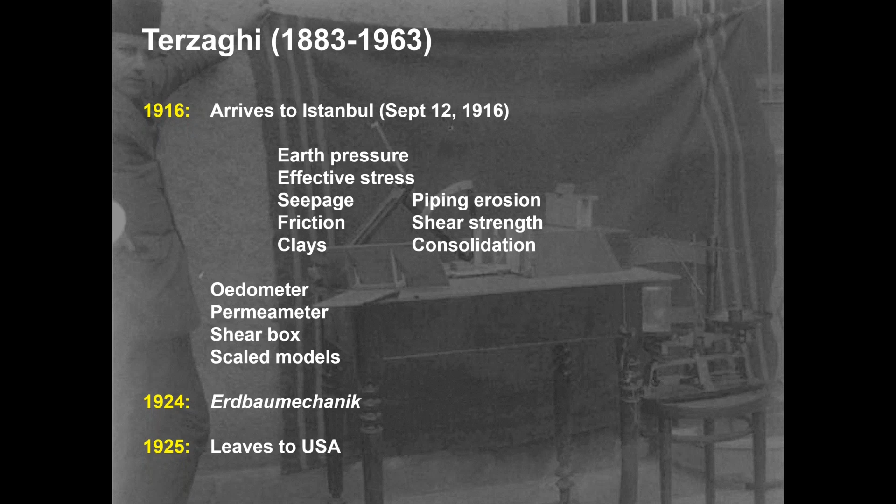By 1925, he leaves to go to the US and he floats back and forth. We'll come back to the story later on during the presentation, but let's look at our field since then.

The field has evolved tremendously because we have had to confront very important challenges related to infrastructure, dams and tunnels, earthquakes. Environmental engineering kept us alive and reinvigorated throughout the 80s and the 90s, and more recently, energy geoengineering. I wonder what's coming next. We'll try to close with those thoughts.

Throughout this evolution, we have also seen significant developments in relationship to lab and field characterization, geophysical methods, numerical simulation. Another important thing: while Terzaghi brought in the mechanics, in one of his early papers, the 1925 ENR paper, he mentions Gouy-Chapman. He understood that double-layer concepts were coming for clay. He got it clear in the 1920s. But basically, he brought the mechanics. Gradually, we brought in the physics and the chemistry, and more recently, primarily in the last 10, 15 years, the biology. This has been the evolution of our field throughout the 20th century and the beginning of the 21st century.

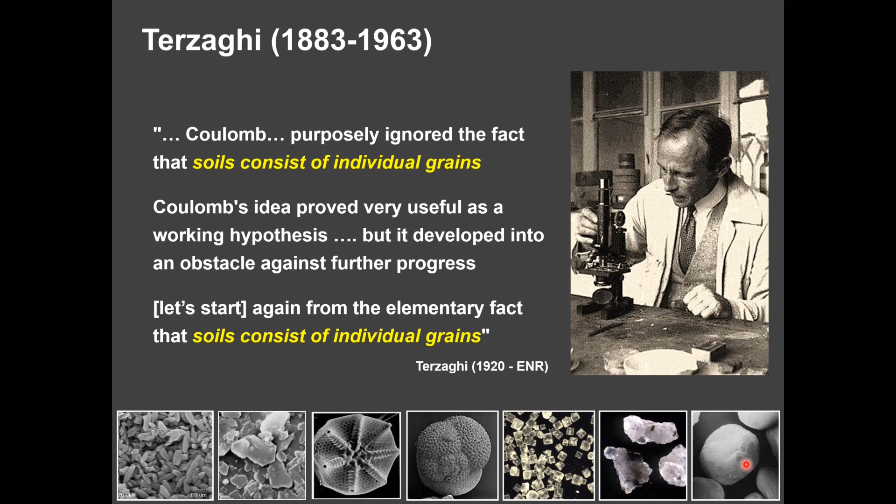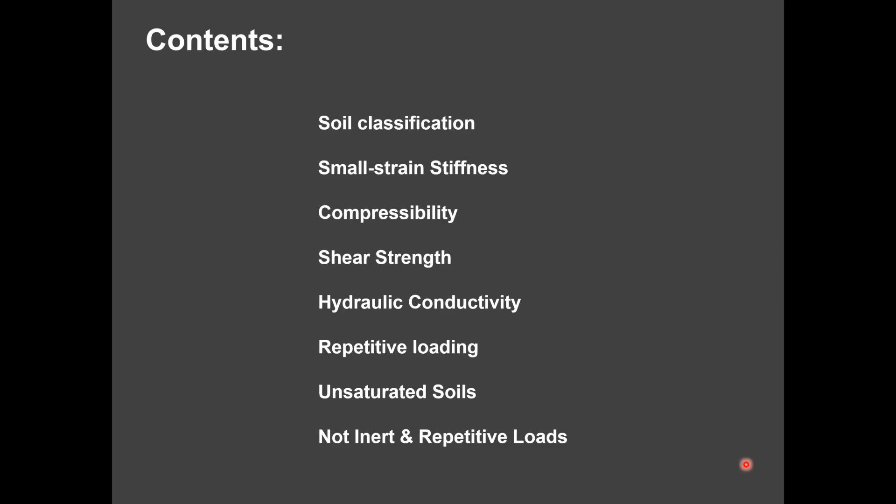Soils are made of grains. With that in mind, we're going to advance through several parts, almost like going through the classical soil mechanics text. But I would like to tell you where we stand at the beginning of the 21st century in each one of them: soil classification, stiffness, compressibility, strength, hydraulic conductivity, repetitive loads, unsaturated soils, the fact that soils are not inert. Let's start.

This is Casagrande. Casagrande was in a bad time after the First War in Austria, and he decided to go and seek new fortunes in the New World. He went to New York, eventually got a job in New Jersey as a draftsman, and from there went to Boston to seek other jobs. During his visit to MIT, he met a fellow called Karl Terzaghi, who had already returned from Istanbul and gone to MIT. He accepted the job on the spot to become Terzaghi's apprentice or assistant. Later on, Casagrande would take the chair in soil mechanics at Harvard, and eventually he would hire Terzaghi back into Harvard.

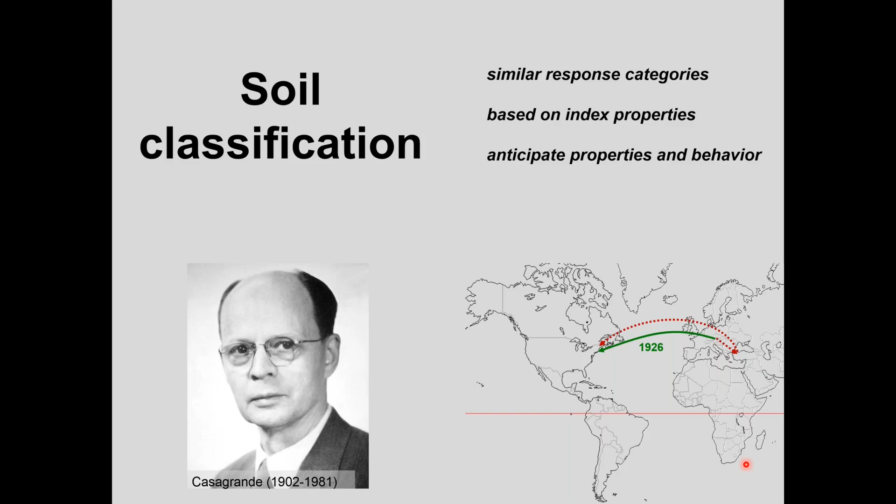Casagrande made amazing contributions. One of them, starting in the late 30s, 1936, and then later all the way to 1948, was the soil classification. Since the late 30s until now, we have gone through 80 years of geotechnical engineering and gathered so much data. It's time for us to reassess soil classification. It's important because we're not just giving a name to a soil, we're trying to cluster soils according to their characteristics to predict and anticipate behavior. These are very important decisions that we make.

There are fine soils and coarse soils, and the distinction is so marked. The sieve 200 is such a wonderful choice, so much wisdom, because the fine-grained soils are formed by chemical precipitation, including all the clays, or by thermal processes like fly ash here on the lower part. Look how spherical they are, like balls hung on Christmas trees. But these are micron size, a few microns in size, and these are diatoms, biogenetically created.

On the right-hand side, it's all about mechanical processes. We crush, we create impacts, completely different mechanisms, completely different shapes. Before I go any further, let me tell you that shape is important, critically important, not only size.

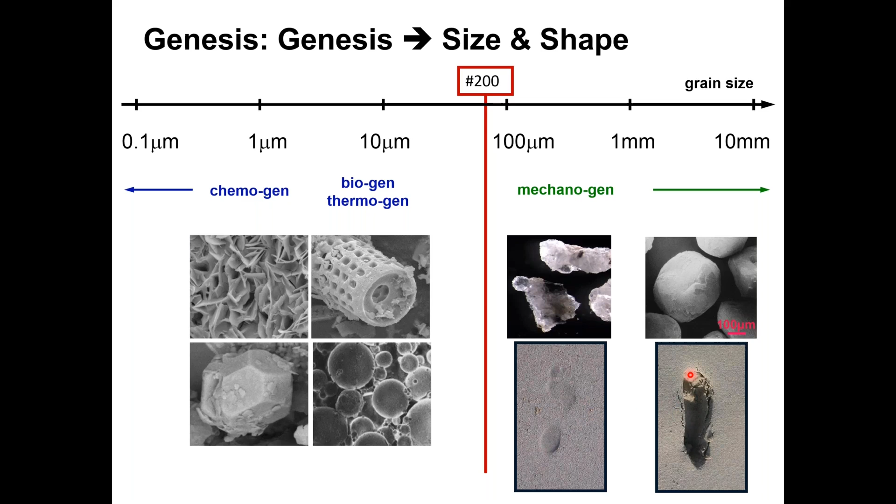If you walk on this crushed sand, this is your footprint. If you walk on this rounded sand—and this is actually Mark Randolph's footprint in the southern part of Western Australia, carbonate, rounded, beautifully rounded carbonate sands—you sink. This is not about capillary forces; these are all just saturated sands immediately after the wave recedes. So shape is critically important, and we'll come back to that.

There's another characteristic that changes across the sieve 200: which forces control the movement of these particles. If the particles are large, like what Tony is working on with rockfill, it's self-weight and gravity, maybe some buoyancy counteracting, but it's all about volume. But with fine particles, you see dust gets stuck to our furniture—those are electrical forces, and you build sand castles with fine sands. Capillarity takes more and more importance as particles become smaller. Drag can move particles, but it's tricky because they need to be small enough to be moved away, but not too small to get stuck on surfaces. Throughout all this, the more you load the soil, the more force every particle has to carry for being part of the skeleton.

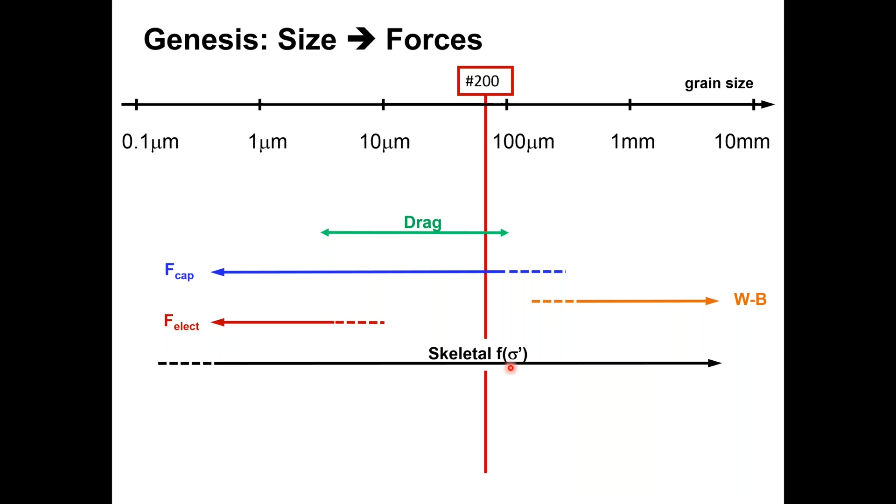So the governing forces change, and here we are converging into the critical aspects of soil classification. On the left-hand side, where electrical forces were important, if you change the pore fluid chemistry, either the pH or the ionic concentration, you change the fabric. Dramatic effects. Beautiful work by Catherine Klein, a former professor at Toronto who passed away too young.

On the right-hand side, we recognize one more thing. We already saw that particle shape was important, but now we realize it's the relative amount of particles. If you have a little amount of fines, the coarse particles form the granular skeleton. But if you have enough fines to separate the coarse particles, now the fine particles control behavior. And this is the heart of soil classification.

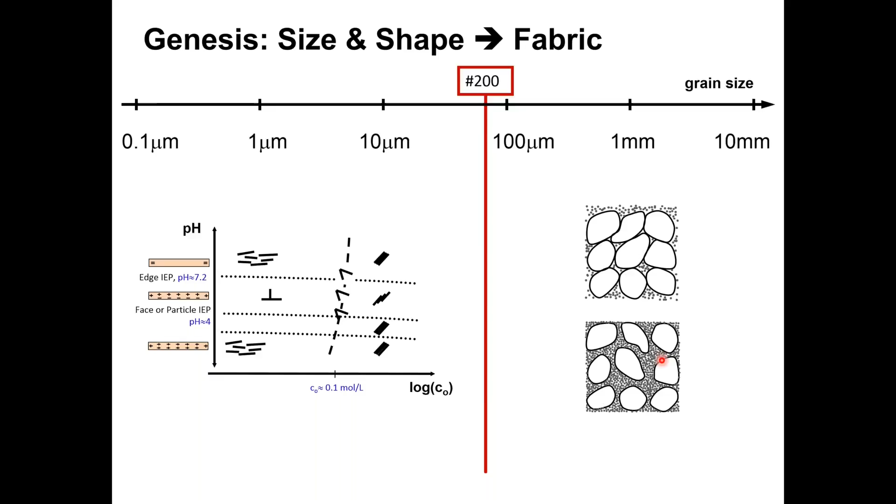For the fine grains, now we don't do the liquid limit and plastic limit anymore. We're doing three liquid limits: with deionized water, with brine, and with kerosene, to control the interparticle forces. We want to see how sensitive the fine soils are to changes in the pore fluid chemistry. And this has a very powerful clustering ability.

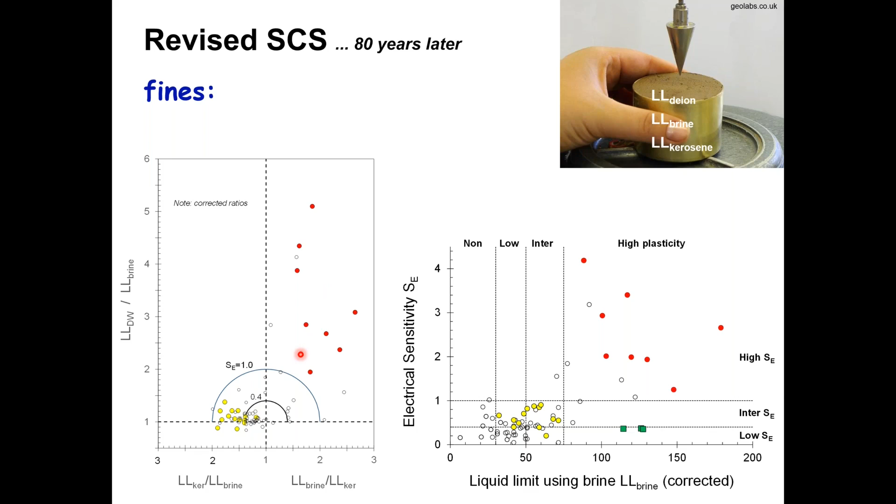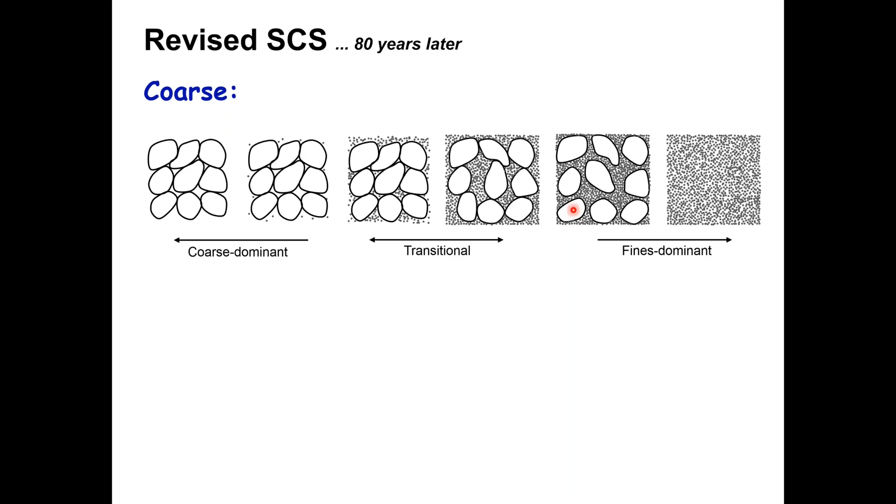On the right-hand side, we're trying to find the thresholds where the fines fill the voids. That's a very important threshold, because when the fines fill the voids, they plug the voids and control permeability. And when the fines separate the particles, the fines control mechanical behavior. So now we can do this with very simple gravimetric volumetric equations, the second week in any soil mechanics course.

And we can put all this in a triangular chart. This is very powerful. On the left-hand side, we are questioning who controls the load carrying capacity. On the right-hand side, who controls fluid flow, permeability. And then we can put nomenclatures that capture both the load carrying capacity and the permeability.

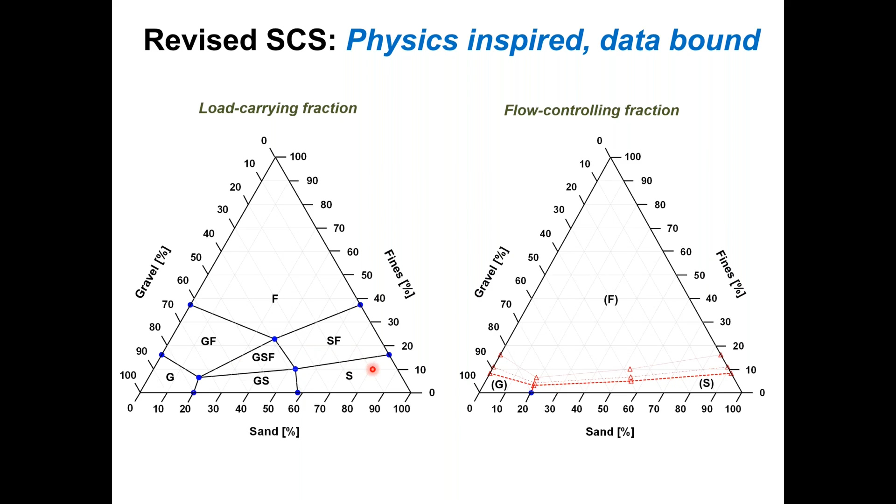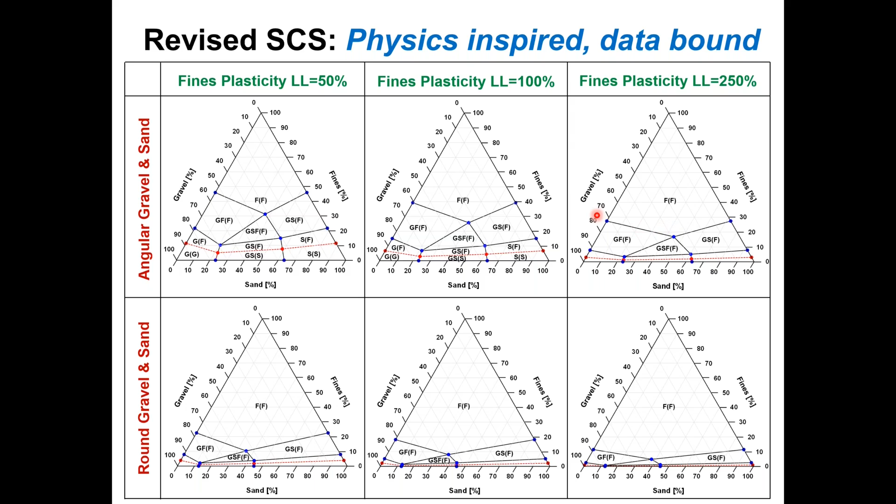Colleagues, these charts and the new soil classification method have been designed taking into consideration not only the physics of fine and coarse soils, but also huge databases we've used to identify all the transition points. I can assure you it is very robust and very predictive. I strongly invite you to look at this. There are several papers on this; I'll be happy to send you all the information. Towards the end, I'll show you an app that can help you—you just put in a few numbers and it tells you the full classification.

So now let me talk about small strain stiffness. When soils deform, there are two stages of deformation. At the beginning, it's like two soccer balls that you bring together—they deform at the contact. If you keep deforming, particles begin moving relative to each other. So there is deformation at constant fabric, and deformation due to fabric changes.

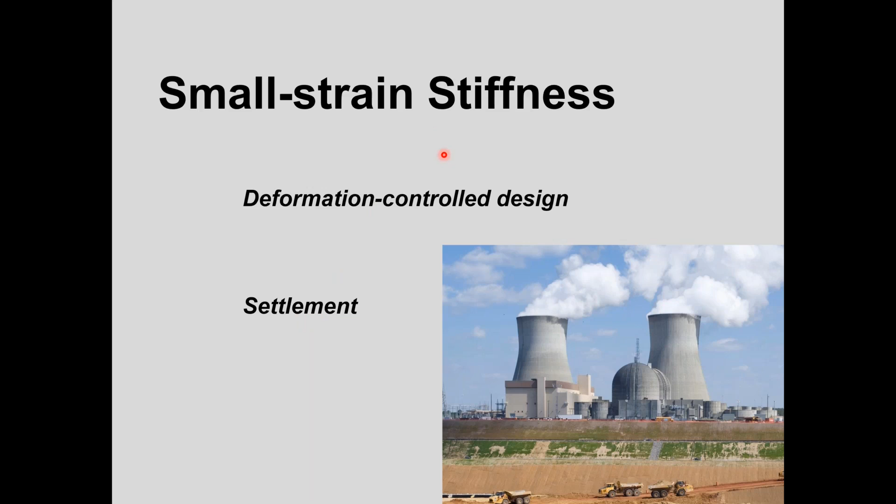So let me show you how the soil responds, because at this point it's the contacts flattening—the two soccer balls coming together, flattening the contacts. When you take a soil, let's say in an oedometer, or this could be a big truck coming on top of a granular base, as the truck comes, or as you're putting load in the oedometer, the travel times get shorter and shorter, and then you remove the load and the contact stretches out again.

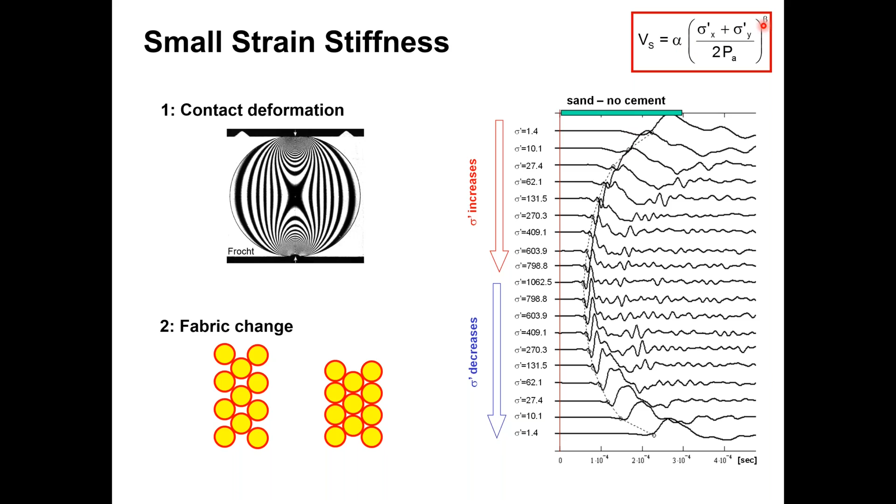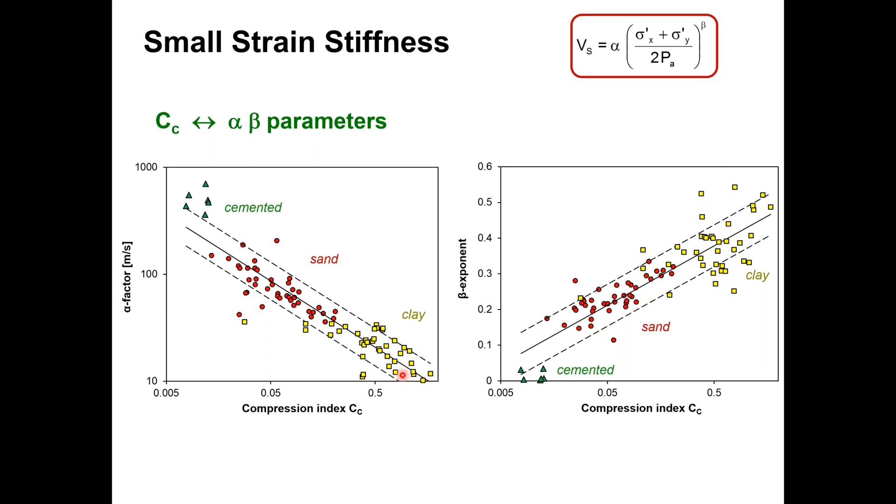So you track the changing state of stress very well, and it follows a power equation. Remember this alpha factor and beta exponent, because we now have very large databases for this alpha factor and beta exponent for different soils—cemented soils, loose sands, dense sands, clays. Somewhere here would be Mexico City clay. And the same for the beta exponent. They are intimately related to each other.

As you can see, there are literally hundreds of points. Each of them involves a large number of tests. So this has taken 20, 30 years to put together from the community around the world.

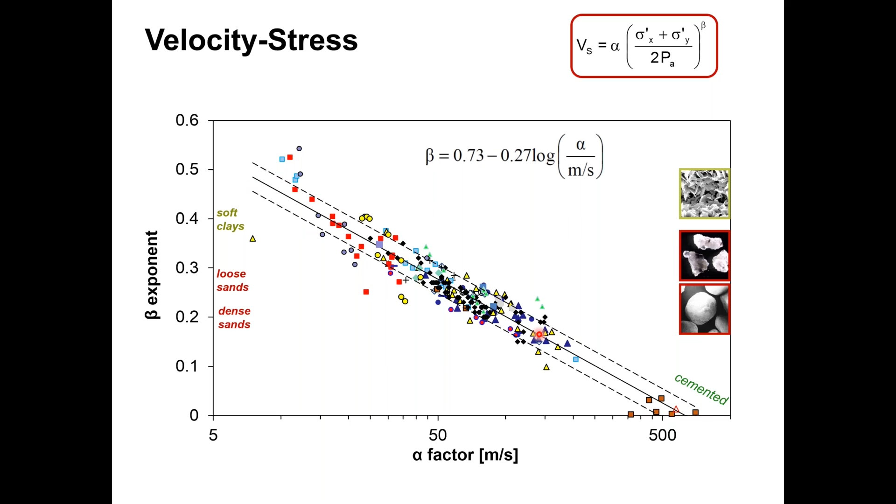Very powerful. Now, what happens if the soil is cemented? Imagine that between the two soccer balls you put gypsum, and now the contact gets flatter—this is actually salt that has precipitated between two spherical grains. And now when I load it, the shear wave velocity doesn't change. It's very stable, because the stiffness doesn't depend on the contact anymore.

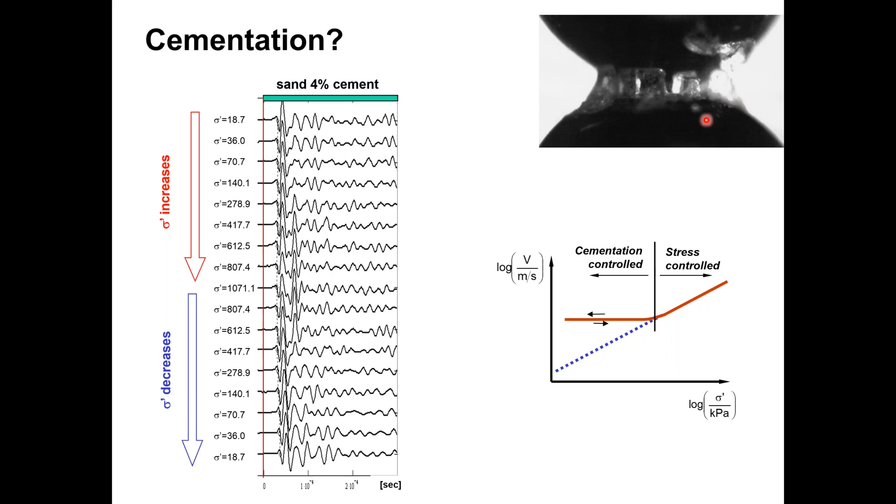Unless you get to a point that you break the cementation and go beyond that, it becomes a stress control again. This is important because soils have been there for a long time, and they become friendly with each other through this form of diagenesis.

So the contacts are always a little bit flatter than in a freshly remolded soil. Every time we sample the soil, imagine the soccer balls, we relax it, stretch, and break the cementation between them. It doesn't matter if you put it back in an oedometer or in triaxial, you do not recover that stiffness that broke.

We have now lots of data, an original paper with Ken Stokoe, but we've added more data that shows the effect of sampling. If you can measure the shear wave velocity in situ, it will lead to very, very good designs.

Now let's talk about compressibility. Let me take you away from soils, because we always talk about the consolidation test, but let's think about the atmosphere. In the upper part of the atmosphere, the molecules of air, nitrogen, CO2, oxygen, are far away from each other. But as the atmosphere gets heavier and heavier on itself, it has to carry more and more weight, so the air gets compressed.

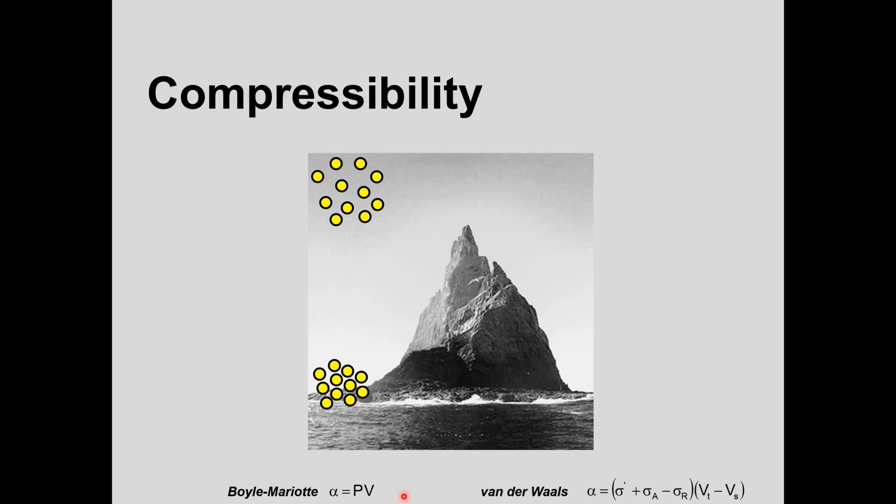That is the reason why we have more air at the bottom, near sea level, than at the top of a mountain. This is the same as self-compaction of sediments in the subsurface, exactly the same. This was, you may remember, Boyle's and Mariotte's law, which van der Waals corrected, etc. I'm going to come back to this. It's exactly the same as soils.

So this is the behavior of soils. Folks, we have made it a tradition in our field to show everything in semi-log scale. And so this, which looks almost like an exponential decay, at some point becomes linearized. Not only that, we force a straight line, typically for the stress of interest, but look what happens with a straight line.

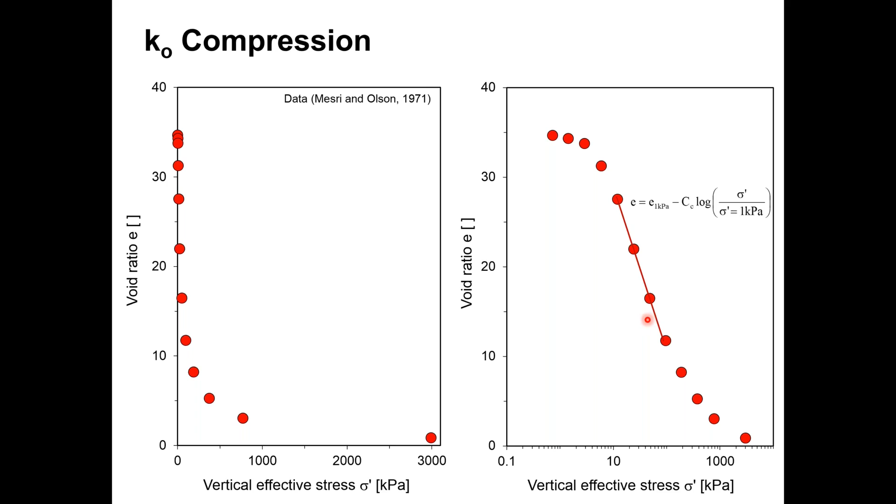If you are out of the area of interest, this shoots to infinite void ratio or to negative void ratio. Both of them are incorrect. So our typical Terzaghi-an model is not asymptotically correct. If you're working in a broad stress regime, for example anything on the seafloor geotechnics or big stress changes, this will cause trouble.

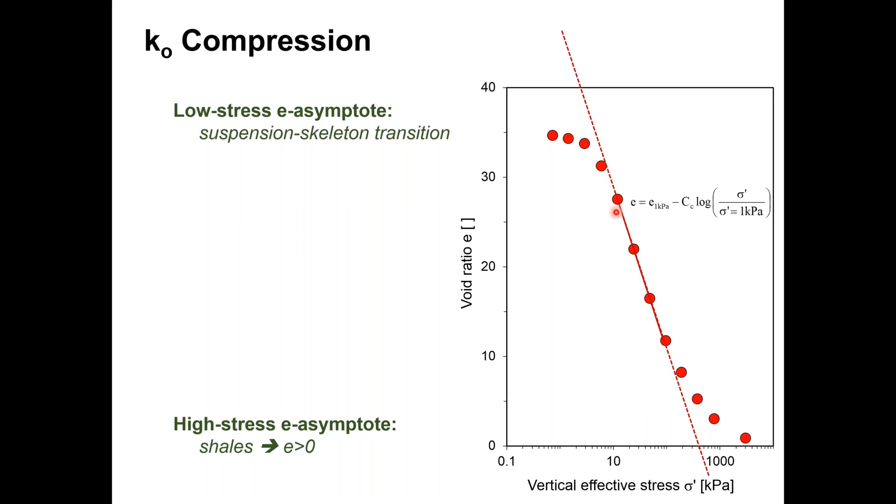So what do we do? Well, we take a double line, what we call here the reloading line and the virgin line, and we make magic to find the pre-consolidation stress. I think we have to walk away from that. Particularly for numerical methods, it's much nicer to have continuous functions, so we can modify this equation to make it asymptotically correct, but we can also take other forms of the equation.

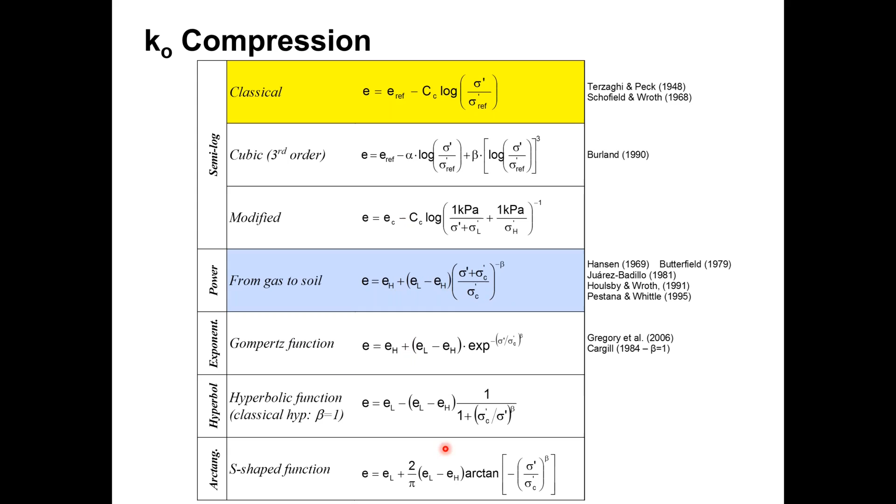I noticed that you're going to have Juan Pestana presenting the numerical modeling. Juan Pestana and Whittle use a similar equation. We have rewritten all the equations here to have a similar structure. But these equations are all very good equations, continuous from low stress to very high stress, and you can fit them whether in linear-log or on the true scale of nature, linear, in different ways.

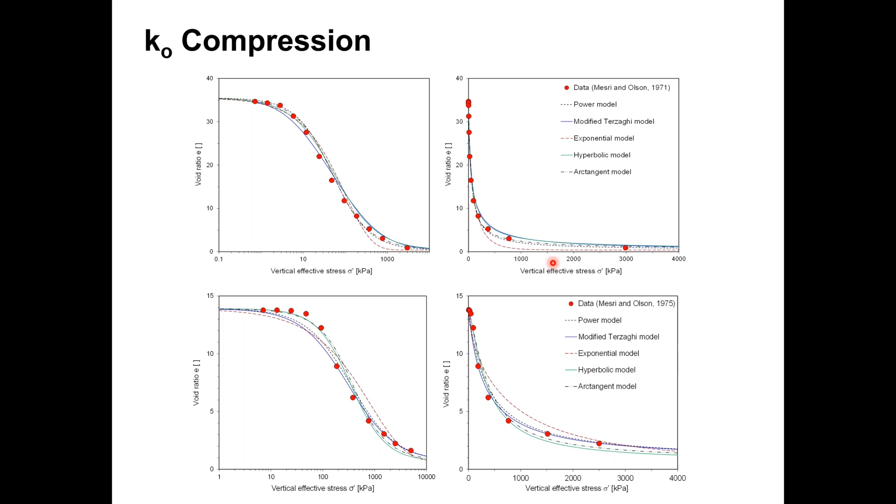Shear strength. Shear strength is a complex one. I've been studying it on and off for the last 30 plus years, and we are still pushing it. So this one is a complex one.

We really trivialize it. We think of Coulomb making this experiment, but this experiment is very simple because it's a solid on top of a solid. When you have a soil and you change the normal load, you are actually changing the coordination number. So it's not just friction, it's rearrangement of particles for the new state of stress.

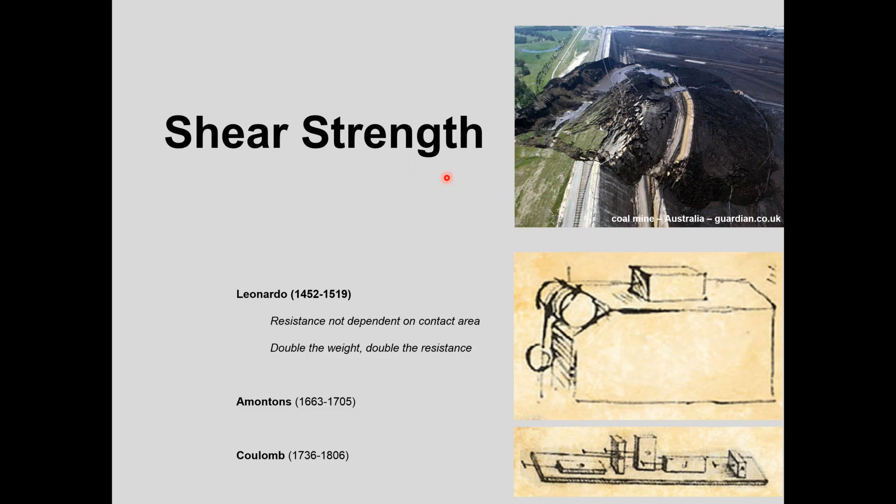So we should probably change the words a little bit, and furthermore, the parameter affects things in an exponential form. If you change the friction angle by 1 degree in your bearing capacity equations, you know that you blow any factor of safety. So this is a tricky one, and we have to keep looking at it.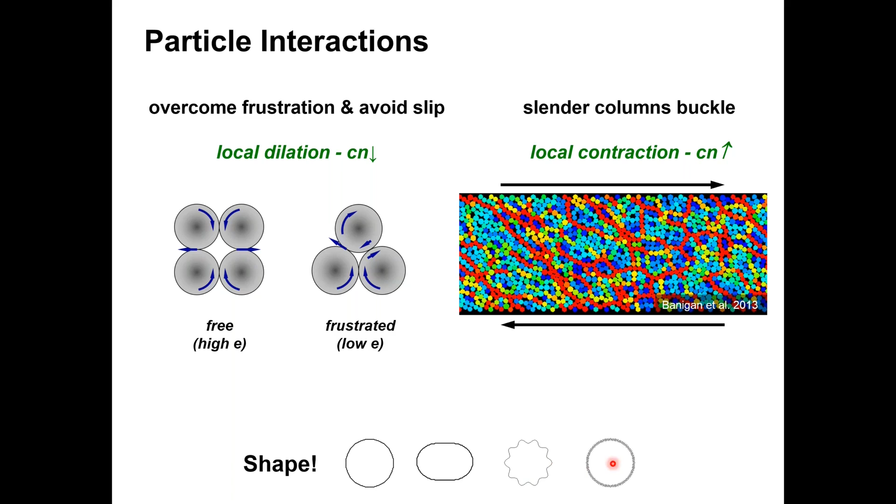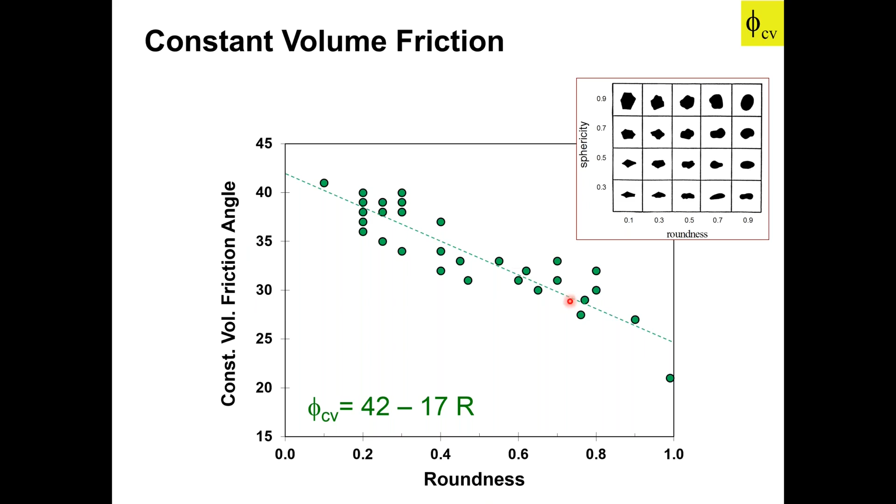And in order to slide and to rotate, you can imagine it's very different if it is a smooth circle or if it has these knuckles and gears, or this roughness. And yes, particle shape will matter again. This is the critical state friction angle, shear at constant volume. And now you see that it is directly related to particle shape. Indeed, we're beginning to understand what is the essence of friction.

Now what happens for dilation? Remember the angle psi that we had? Well, it all depends how far you are from critical state, how much it needs to dilate to get there. So this is Been and Jefferies' classical work. And with more data, this really works extremely well.

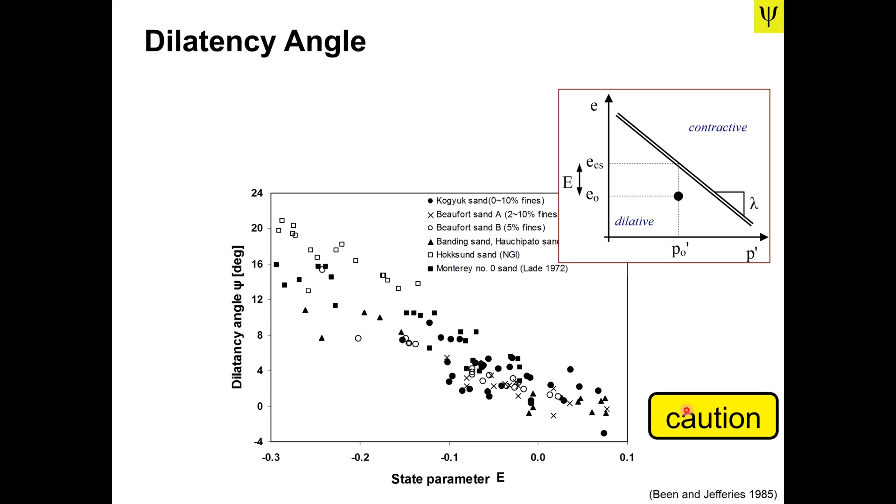But I caution you out here, because whenever you localize, the rest stops dilating, because that becomes a weak point, and now there is shear localization. So how we interpret our volumetric changes, etc., becomes very tricky.

Finally, what is the residual friction angle? Well, if you keep shearing for larger and larger deformations at the base of a landslide, and typically in the laboratory in the ring shear, many things may happen. Imagine rice grains - we actually did those tests at Waterloo. Rice grains would align, and now they would slide preferentially on top of each other.

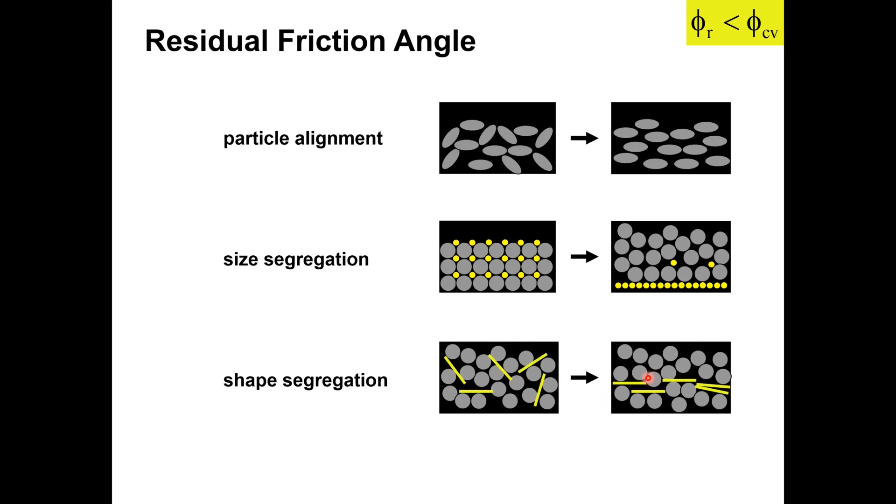And if there are fines and coarse grains, the fine grains gradually fall down, and now the coarse grains can ride over a smooth surface of fine grains. And if there are micaceous sands, mica platelets, they will segregate and they will align, forming a plane for sliding. These are all different mechanisms that lead to residual friction angle, and because of platiness, clays tend to give us a very low residual friction angle, intimately related to plasticity index, equally well to liquid limit.

If something appears here weird, it's diatomaceous soils. If you have diatoms, be careful, and you may go back and see Leroueil and Diaz Rodriguez paper on Mexico City soils, where they measure 42, 44 degree friction angle for a soil with a liquid limit of 350. So really impressive.

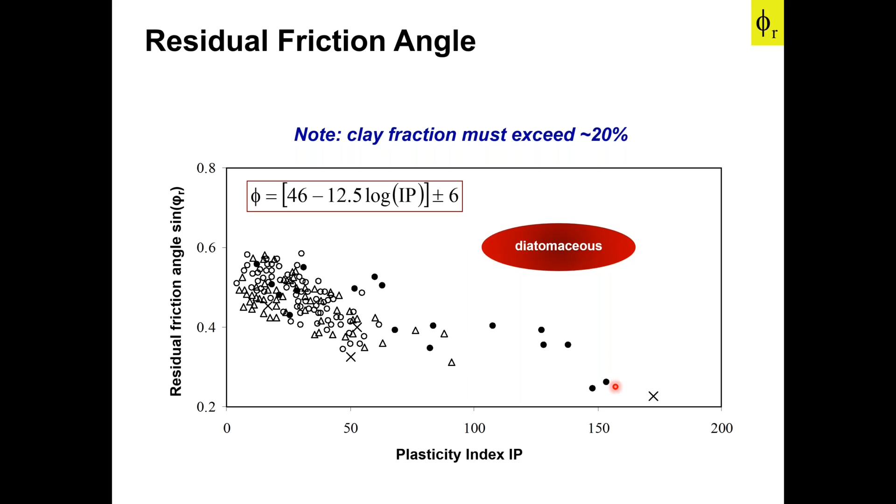Before I leave friction, it's such an important process, I want to say a couple more things. Imagine that we made the angle of repose, but then we played a trick. At the base, we have a trapdoor, and now I remove the trapdoor and let the cone fall inwards.

Now I'm going to see that I have two different angles, the internal one and the external one. You see, when you make the angle of repose, two grains at the top go down and separate from each other. They keep moving away from each other. But when they converge towards the hole in the center, two separate grains come closer and closer together.

So depending on how you shear a soil in axial compression or lateral compression, you are going to have completely different friction angles. How different? 50% different, not 1 or 2 degrees. This is a huge difference. Frictional anisotropy can be very pronounced.

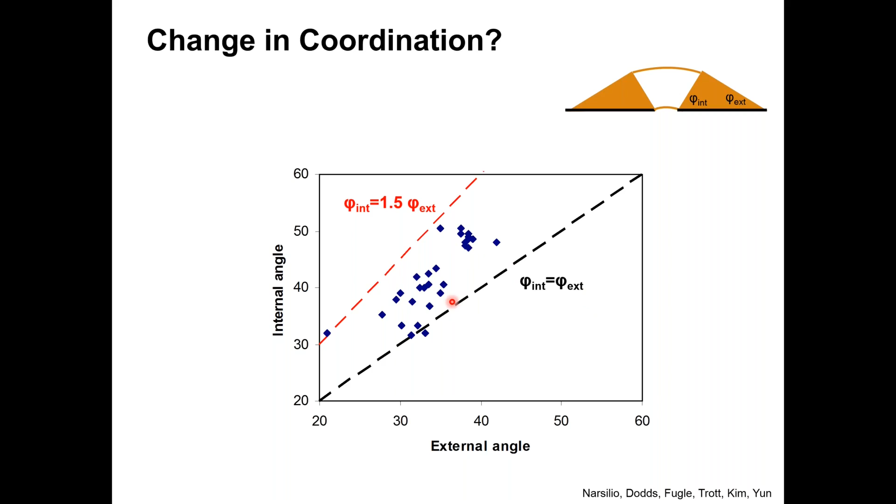Interesting work coming from the University of Calgary on that one, during the liquefaction studies. And so this is real data that confirms what I just said.

I need to move on to tell you about the position of the critical state line. Work done, including many tailings studies in Canada, etc., shows that the position of the critical state line, let's say at 100 kilopascals of confinement, a fairly characteristic number for us, is intimately related to the Emax and the Emin.

So folks, if you are looking into the critical state behavior, for example for mine tailings or granular soils, sands and silts, look at what is the Emin and Emax, and you know that you're going to find the critical state line crossing at 100 kPa somewhere between these two limits.

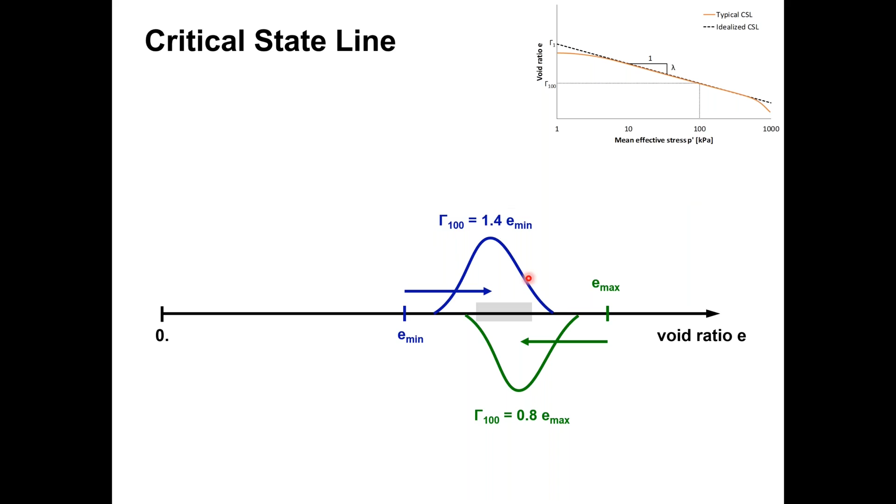There is so much we could add, but we have a few minutes left. I'm planning to finish in 45 minutes. So in the next 15 minutes, I'm going to cover a few more topics in geotechnical engineering and how they are evolving with the understanding and data we have gained over the last 100 years.

What about hydraulic conductivity? We mentioned Leonardo before when discussing the early studies of friction, but he also came up with this idea of the parachute. The idea is that if you jump from an airplane, you might as well have a parachute. Otherwise, your velocity at impact will be too high.

So why does the velocity decrease? Well, because as the drag increases, the drag resistance and your weight cancel out. There is no more acceleration, and you stop increasing the velocity. That is the essence of it.

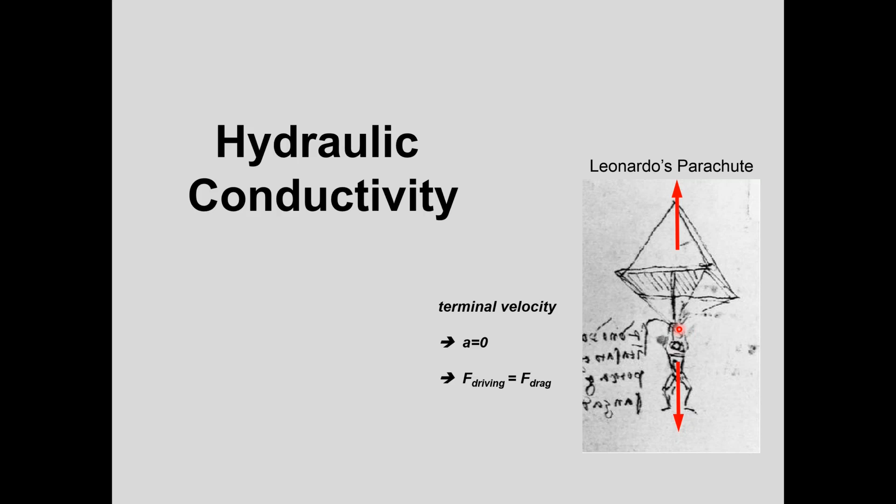And this is the essence of hydraulic conductivity. It's about drag along the pore walls. So the more surface area you have to rub against the mineral grains, the more drag there will be, and the lower the hydraulic conductivity. That is captured in the Kozeny-Carman equation. It's really quite lovely physics, and it works.

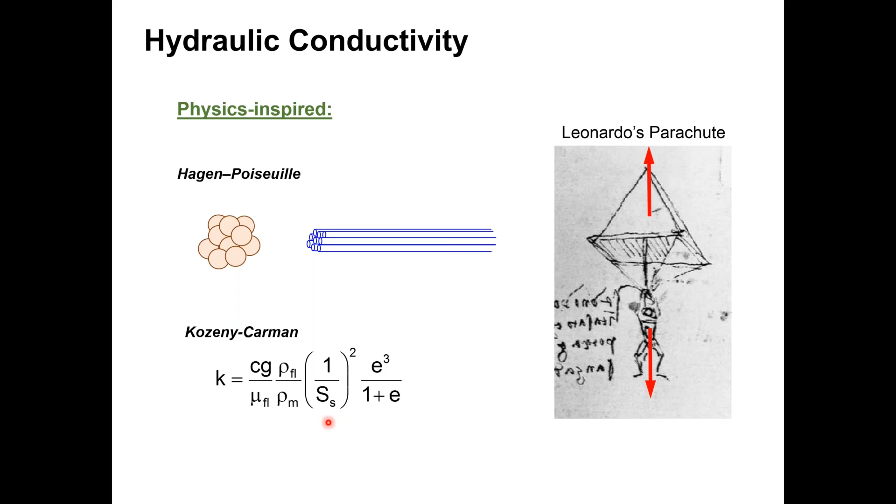So I'm going to walk away from the theoretical solution to now explore real data, but I know it's going to be related to the specific surface. And so this is data collected from all over the world, specimens of all kinds, from bentonites here to sands and silts, and fly ash is somewhere here.

And you see, it is not about porosity or void ratio, because clays have higher porosity and void ratio than sands, yet they have lower permeability. So it's not about porosity, it's about pore size.

But before I confirm that point, let me show you one thing. All these lines for a given soil follow a linear relationship in log-log. That means that this is a power equation. And the power equation depends on two parameters.

One is the permeability at a given void ratio. So let's take a normalizing void ratio of 1. If the soil doesn't cross it, you can always extrapolate to 1. So this is the void ratio, this is the permeability at void ratio 1. And then I can predict the permeability at any other void ratio. I just need to find out an exponent.

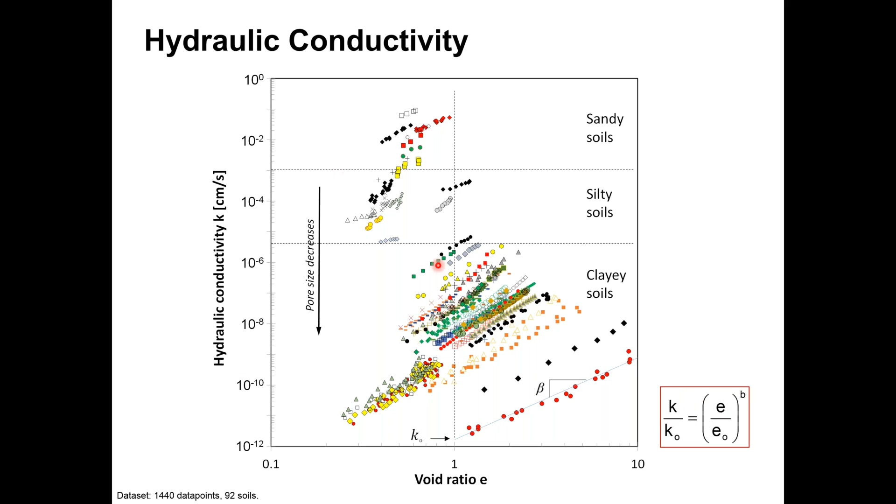Now, if this works, I should be able to collapse all this somehow, and we did it. Remember the previous equation was a function of a specific surface? Indeed, and here we put the void ratio, because if I divide these two, I'm actually computing the mean pore size. A very easy way to estimate the mean pore size.

And look, all this data that was spanning 12 orders of magnitude collapses pretty much on a single trend when you plot versus mean pore size. Really amazing. It's almost like you understand God's laws when things like this happen.

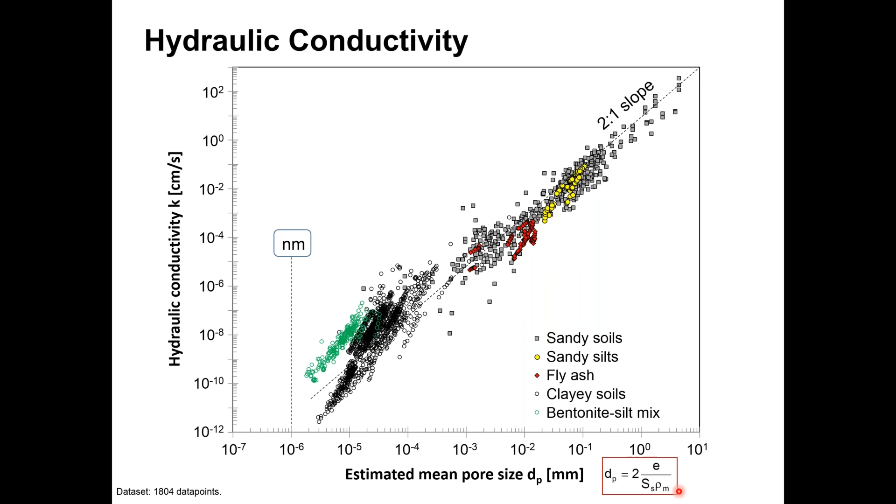We wonder what controls permeability at void ratio 1, and it's all determined by the specific surface. Measure the specific surface and you are going to be right on target, and it's so easy to measure. Add specific surface to your list of laboratory tests.

Why do we still have spread in the data? Because there is something in soils similar to society: only 10% of the parts carry 90% of the load. The same happens with pores and fluid flow—about 10% of the largest interconnected pores are responsible for most of the flow. Spatial correlation and variability are responsible for the rest.

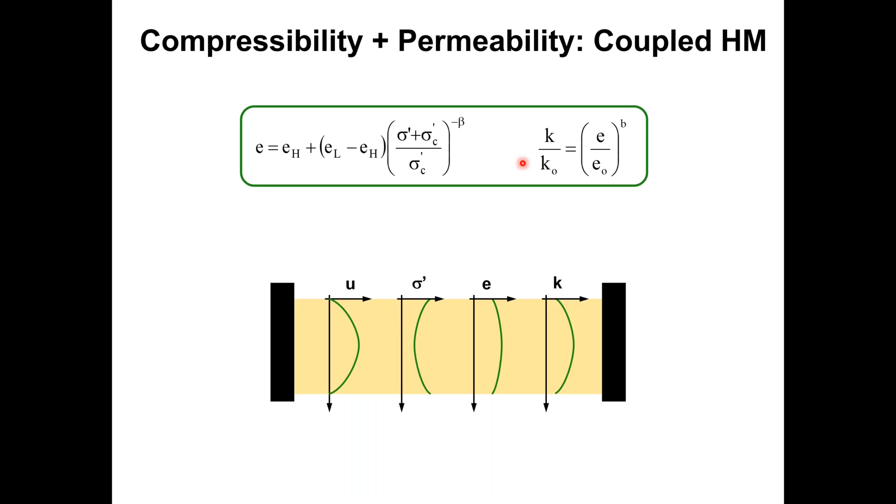Before leaving permeability, we now have new models for compaction and consolidation, and a power equation for permeability. We can approach any consolidation problem, marine sediments, etc., and walk away from Terzaghi's one-dimensional consolidation, which makes so many assumptions about linearity that in many cases we'll be violating those assumptions. This approach goes back to the fundamentals.

I have only a minute or two to talk about multiphase fluids, unsaturated soil mechanics. This field is much greater than unsaturated soil mechanics, but it has a beautiful, rich history—go back to Terzaghi 1943, and it's beautiful to see how well he understood it. Then Aitchison in Australia, then Bishop in the UK, Bishop and Blight, Fredlund and Morgenstern—magnificent contributions from the 1970s. That was picked up later by Alonso and Gens, who brought unsaturated soils and critical state soil mechanics together. These are exceptional contributions, an amazing history in our field.

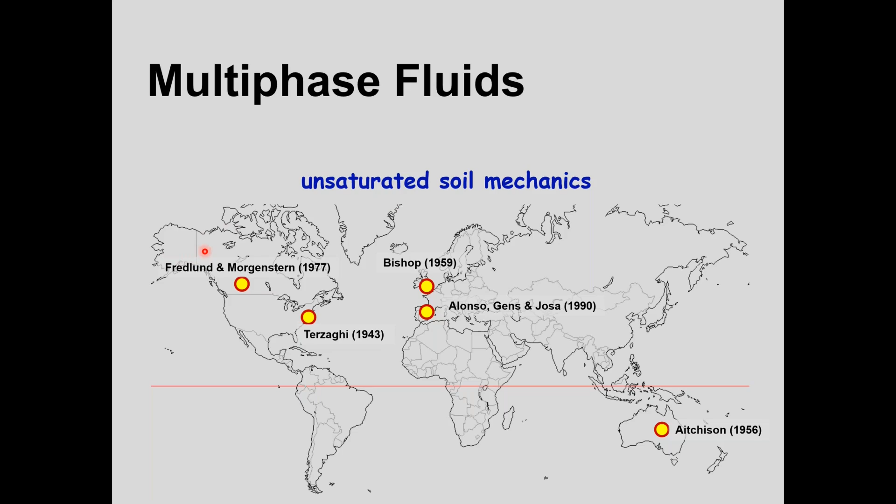I'll just say the following: if we want to understand at the particle level what Terzaghi was saying, you need to understand what is happening at the particle level to feel the soil. In the context of unsaturated soils, you need to understand interfacial tension—the one that lets a spider walk on water—the contact angle, whether a water droplet will curl like on a Teflon pot in our kitchen, or spread out like on a clean glass. We need to understand interfacial tension, contact angle, and the shape of pores—that is the complexity.

Once again, I go back to the work at Waterloo. Dullien's book is just an amazing book, the late Professor Dullien.

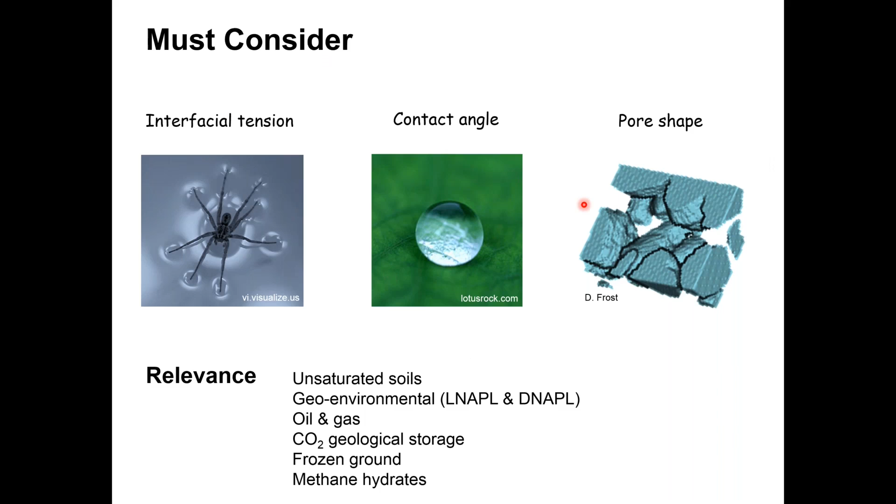This is relevant not only to unsaturated soils. If you're in geoenvironmental engineering and want to understand trapping and remediation for LNAPLs and DNAPLs, or in oil and gas and want to recover just 1% of residual oil—which is huge, probably $100 billion in Saudi Arabia alone. If you want to inject CO2 for geological storage, which we have to do, or if you're thinking of frozen ground or methane hydrates—the same phenomenon. We need to understand these processes. I'll leave it at that, and I'll be happy to come back and chat with you about this.

Two more thoughts. One: please remember, soils are not inert. We tend to see soil and think it has been there forever and will be there forever in the same form.

Consider the Brumadinho tailings failure, the volcanic ash evolving in Colombia, in Manizales, or the thixotropy of Mexico City soil that you miss and then wait and it hardens, the formation of hydrates, the dissolution of carbonates in Florida karst terrain, the collapse of fly ash dams in Kingston, desiccation and frozen ground, whether in the Midwest or throughout North America. These are all processes continuously reminding us that soils are not inert.

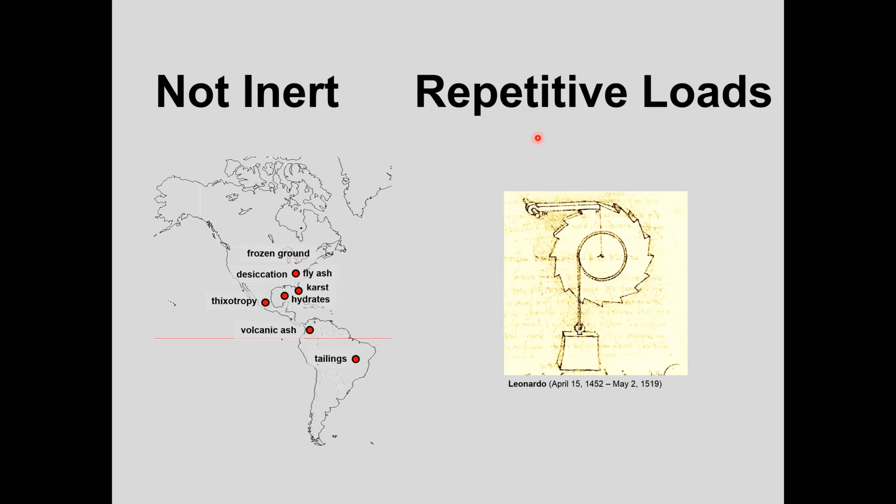Furthermore, loads are not static. Just a couple of thoughts on this. This is volcanic ash—it gets deposited. I have measured volcanic ash from many parts of the world, from Pinatubo to 10 different volcanoes. Fresh, it's always the same void ratio, low specific gravity, amorphous volcanic glass.

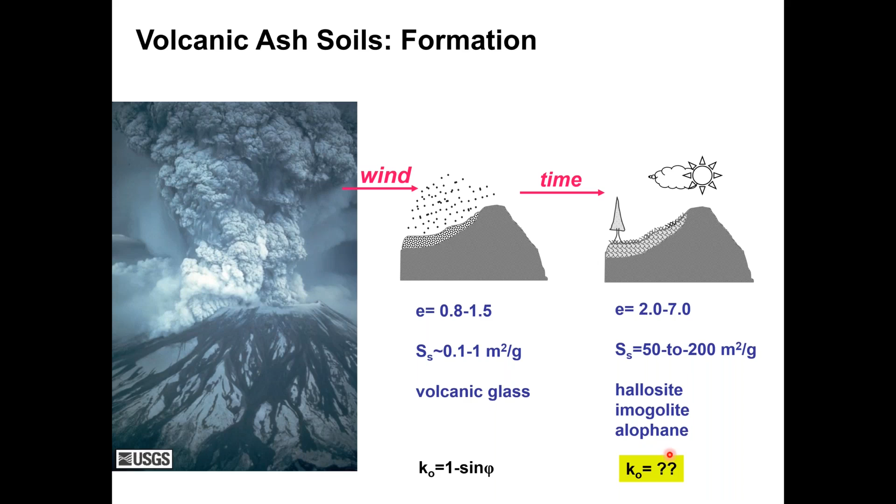Come back 5,000 or 10,000 years later, it's completely different. It was a wind-blown deposit that has evolved in situ, and now the void ratio is huge, the specific surface is huge, and this has dissolved and recrystallized to form halloysites, imogolite, allophanes with very strange K0. The strange K0 is such that if you go into an excavation, the soil has developed shear failure in contraction because grains are dissolving and reforming. Some of you have been involved in this case—there were 6 or 7 Corvettes that fell into this hole all of a sudden.

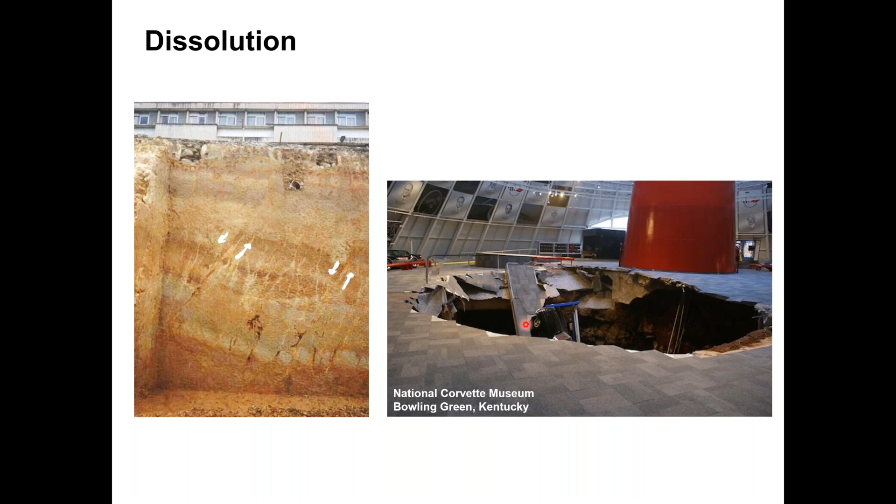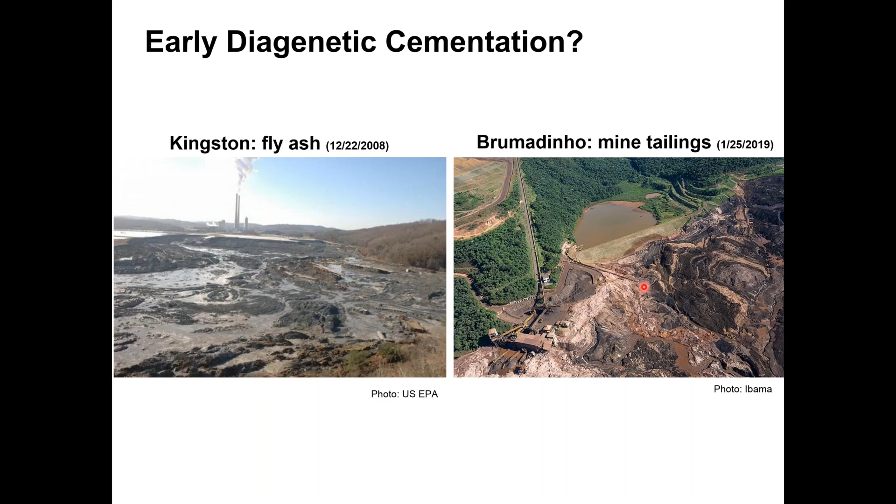Some of you have been involved in the Kingston fly ash disaster, one of the greatest environmental disasters, and Brumadinho. We have to wonder, how could systems that were stable for such a long time fail all of a sudden?

One possibility is that if you take fly ash, for example, and in many cases tailings as well, and mix them into a slurry, and measure the pore pressure, the pore pressure is gone. But with shear wave velocity, which we showed you is so powerful to measure small things, you monitor how the wave changes with time. After 4 days, the travel time is getting shorter, the wave velocity is getting higher and higher.

A sand underneath your feet would never have more than 150, 170 meters per second. But this fly ash, with absolutely no weight, no excess pore pressure, no desiccation, with water on top of it, all of a sudden becomes cemented and develops huge stiffness.

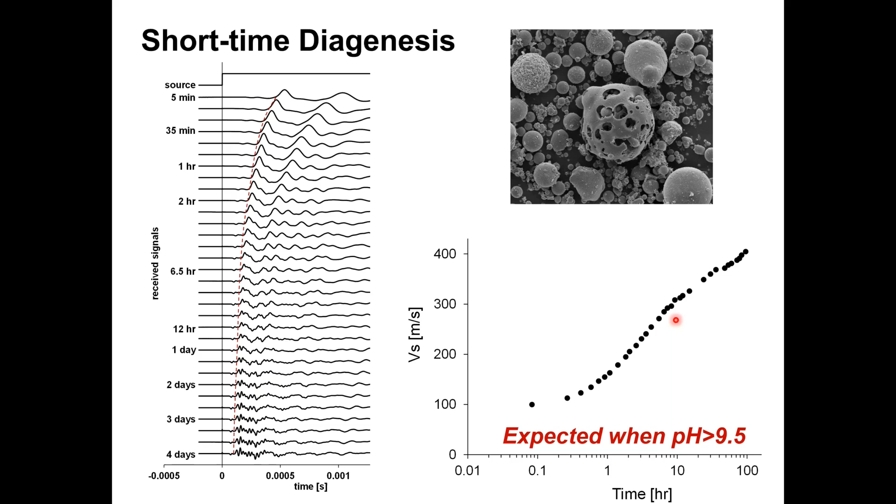Now what happens if you put another layer, another layer, another layer? This cementation will lock in porosity, and then it may suffer internal collapse. We have to be careful with some of these processes.

With respect to repetitive loads, don't think only of repetitive loads underneath a machine foundation, a levee, or a wind turbine. Think of repetitive loads from changes due to changes in relative humidity.

We already showed you that changes in pore fluid alter the compressibility, the fabric of the soil. What will happen with cities built on deltas?

And what happens with cycles of freeze-thaw, which are already happening in the southern parts, but now are going to begin moving to areas where there was permafrost?

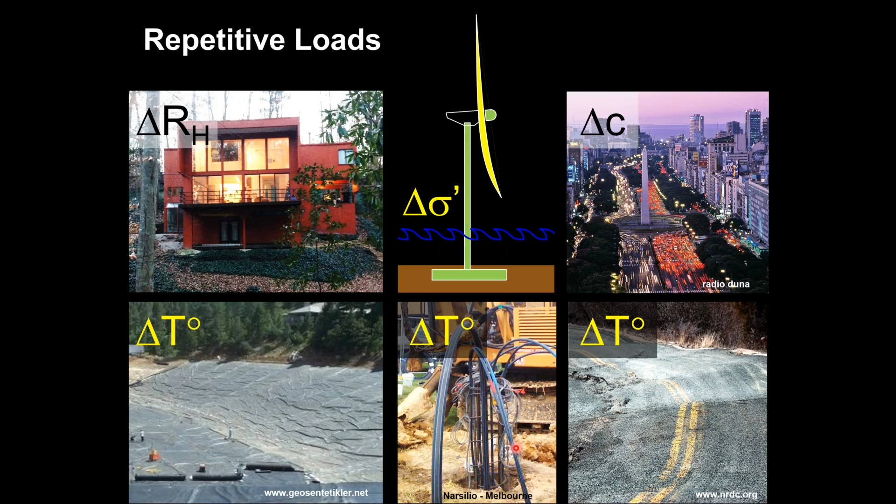This is a pile where we either inject cold water during the winter or produce heat—all these thermal cycles. What will it do? Will the pile ratchet itself down or not?

Even sand, just in an oedometer—look, these are 10,000 cycles. Look how it began compacting itself in an oedometer under K0. Do not overlook repetitive loads of all kinds.

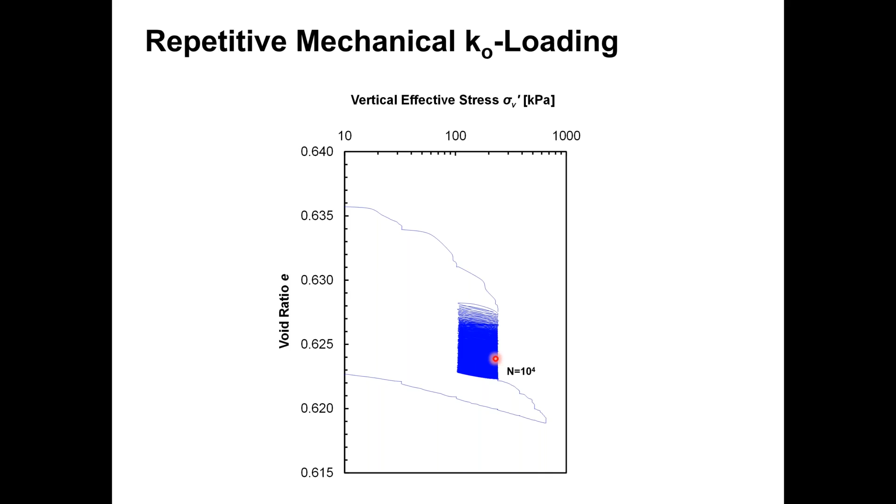Then the next hot season comes and everything expands out, and the next cold season comes in and this falls down. This will ratchet itself and the wedge will fall off.

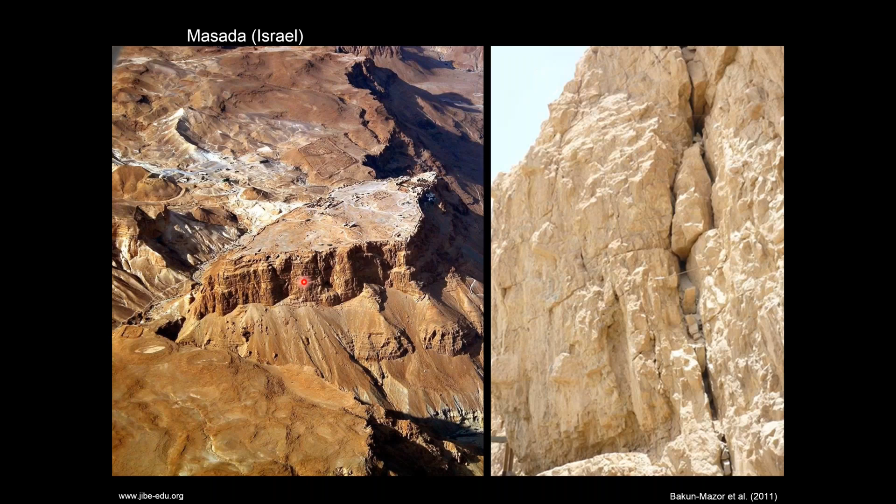And wedges are falling off in the famous Masada mountain in Israel, so important for Israeli history, because of these choke blocks that keep falling off, ratcheting their way down.

The times are changing, colleagues, and where do I think things are changing? A few examples.

Remember the periodic table of elements we studied in chemistry? This was Mendeleev, who developed it. When he developed the table, he had less than half of the elements we know today, but he put all the information on cards, then sorted the cards on a table, sorting and sorting like assembling a puzzle, and left holes for the elements we did not yet know. Amazing.

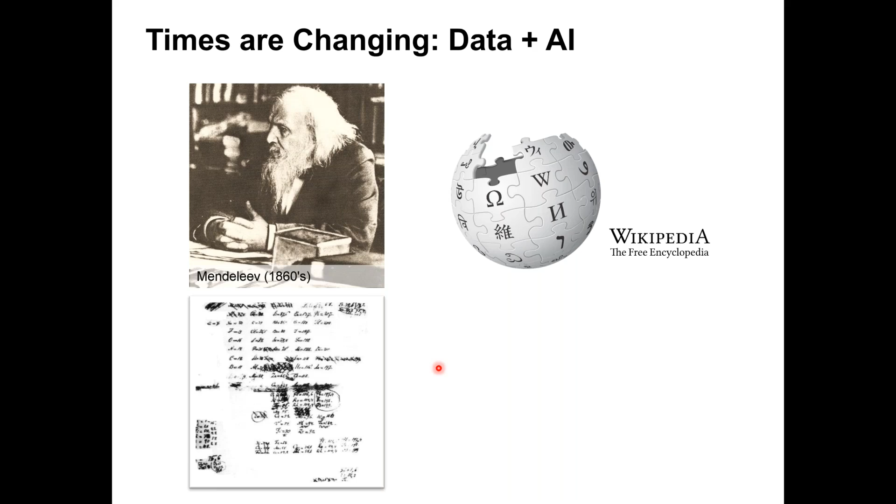Well, we are now collecting lots of information because people are contributing, for example, to Wikipedia—what an amazing resource. And look at the information that Netflix, Amazon, Google, Facebook have about each one of us. They know more than our intelligence officers in the government. They know almost everything about us.

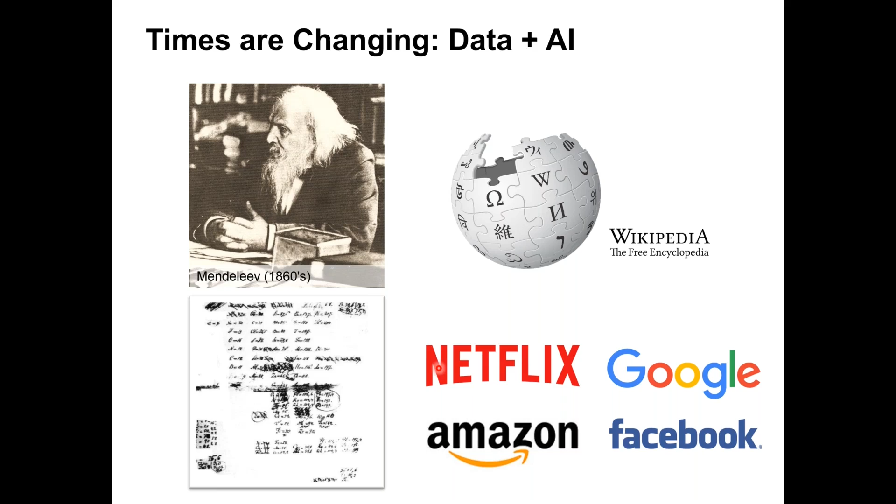Scary, but it's the power of data and data synthesis. So we are doing that for soils. We are compiling large databases of soils. Right now we have more than 6,000 entries, and we put all the index properties on one axis and the engineering design properties on another axis.

The hope is that we are using AI tools and inverse problem solving to predict from simple index properties a self-consistent set of parameters for design, because it's very difficult to feed complex parameters to these complex simulators we use nowadays. But we also have the soil classification system in an app, which makes it trivial to use. This one will talk to that one, and from that one you will be able to infer a lot about what to expect from the soil.

We have multi-physics cells where we measure multiple things at once. With a cell phone, we take pictures with a little lens, which makes it into a microscope, and we determine particle size and particle shape. From there we know Emax and Emin and angle of repose. Just in case, we measure the angle of repose with a little cuvette that we have prepared, the internal and the external. With all these properties, we know so much about sands.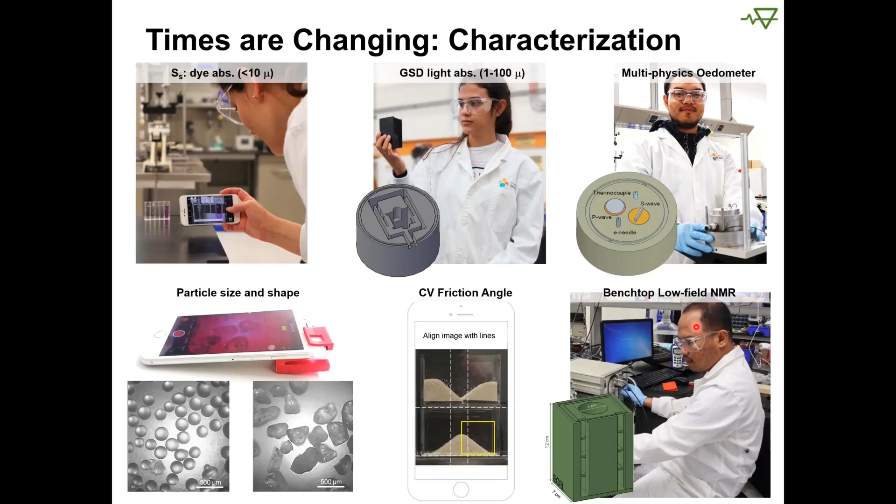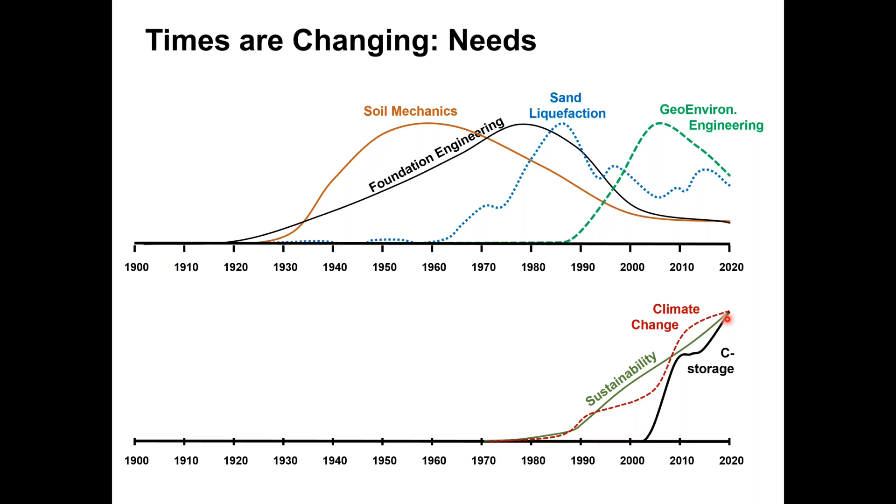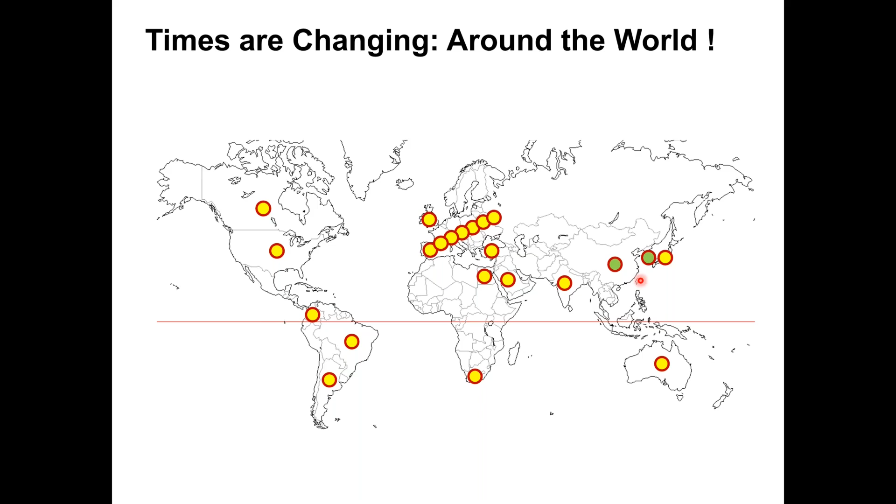So in conclusion, we have gone around the world in these 100 years. There seems to be a need to do a comprehensive revision and then to prune some concepts that probably we shouldn't use anymore, and expand on new ones that are needed to confront the new challenges.

If we're going to work with models and correlations, they have to be physics-inspired. They have to satisfy the data, be consistent with the physics, be asymptotically correct. There is a revolution going on in experimental methods, in the laboratory and in the field. Be careful with shear localizations and localizations of all kinds, in fluid flow, in dissolution, Karst terrain, etc. They are really a nightmare.

Coupled hydrothermal, chemo, biomechanical processes — I didn't have the chance to talk about it much, but remember, soils are not inert, and do expect repetitive loads throughout the design life of the structures.

And we have had an amazing 100 years. Times are changing, and let's be ready. Let's make the best of it.